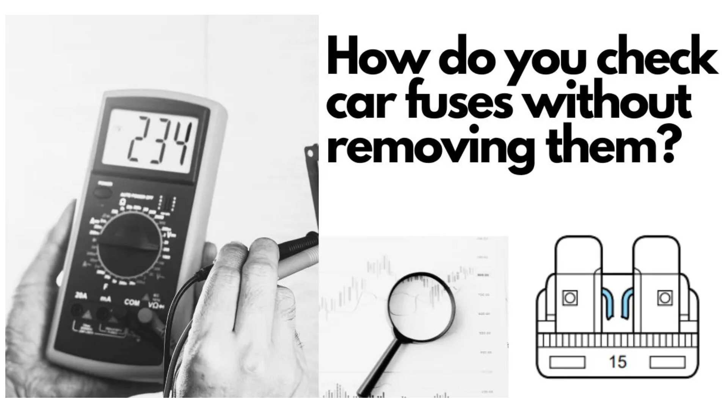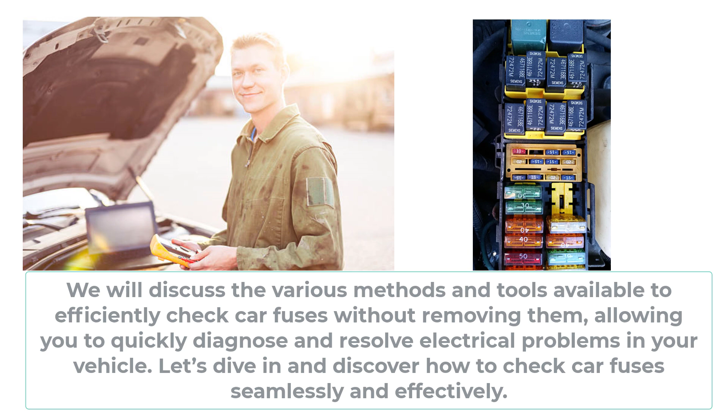In this video, we will be answering the most often asked question by car owners facing frequent issues related to electrical fuse errors: is it possible to check car fuses without removing them? We will discuss the various methods and tools available to efficiently check car fuses without removing them, allowing you to quickly diagnose and resolve electrical problems. Let's dive in and discover how to check car fuses seamlessly and effectively.

What to check before replacing a fuse. In the process of checking car fuses without removing them, it's important to prepare adequately for the task. Being well prepared sets the stage for a more efficient and accurate evaluation of the fuses, increasing the chances of identifying any potential issues without removing them.

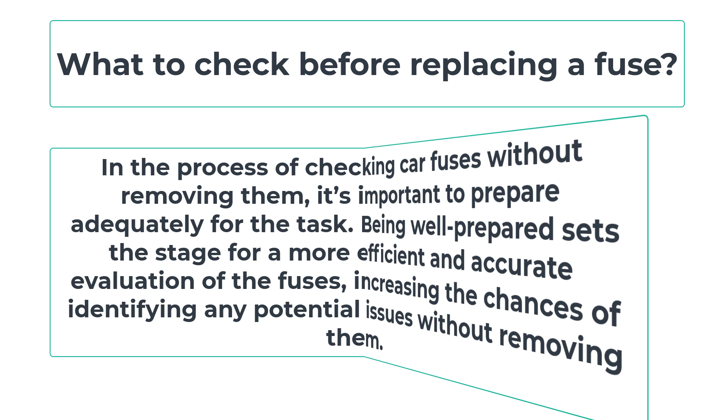Turn off the car. It also allows the fuse box to be safely accessed without the risk of live electrical connections. Consult the owner's manual and pay attention to any specific instructions or warnings mentioned. Ensure a clear view of the fuse box, which will allow you to navigate it more comfortably and ensure a comprehensive assessment of each fuse.

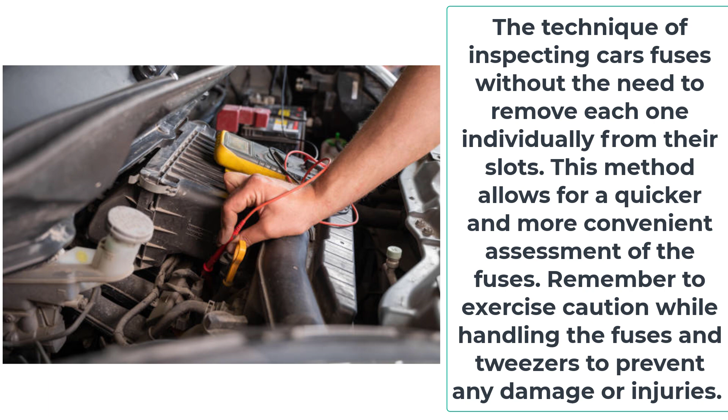The technique involves inspecting car fuses without the need to remove each one individually from their slots. This method allows for a quicker and more convenient assessment of the fuses. Remember to exercise caution while handling the fuses and tweezers to prevent any damage or injuries.

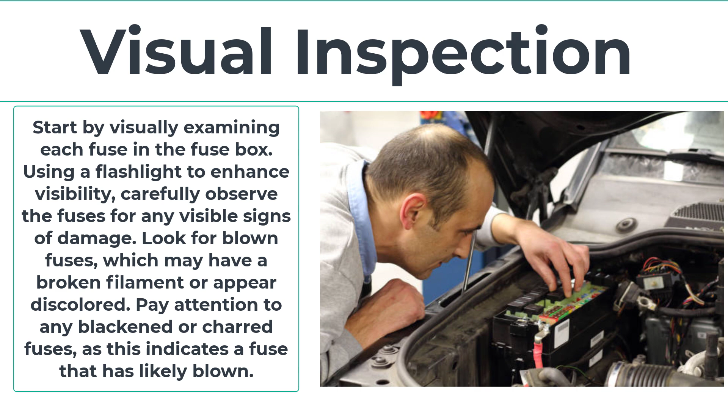Visual inspection: start by visually examining each fuse in the fuse box. Using a flashlight to enhance visibility, carefully observe the fuses for any visible signs of damage. Look for blown fuses, which may have a broken filament or appear discolored. Pay attention to any blackened or charred fuses, as this indicates a fuse that has likely blown.

Magnifying glass: if needed, utilize a magnifying glass to closely inspect smaller fuses or examine any intricate details. A magnifying glass can help you identify subtle signs of damage that may not be immediately visible to the naked eye, allowing for a more thorough examination and increasing your chances of detecting potential issues.

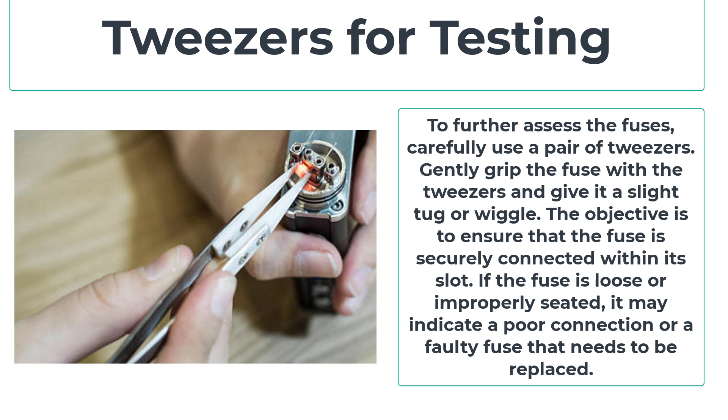Using tweezers for testing: to further assess the fuses, carefully use a pair of tweezers. Gently grip the fuse with the tweezers and give it a slight tug or wiggle. The objective is to ensure that the fuse is securely connected within its slot. If the fuse is loose or improperly seated, it may indicate a poor connection or a faulty fuse that needs to be replaced.

Test the fuse with a test light. To check car fuses without removing them, a test light can be used. Simply press the test light against one end of the fuse and ensure it illuminates, then repeat the process on the other end.

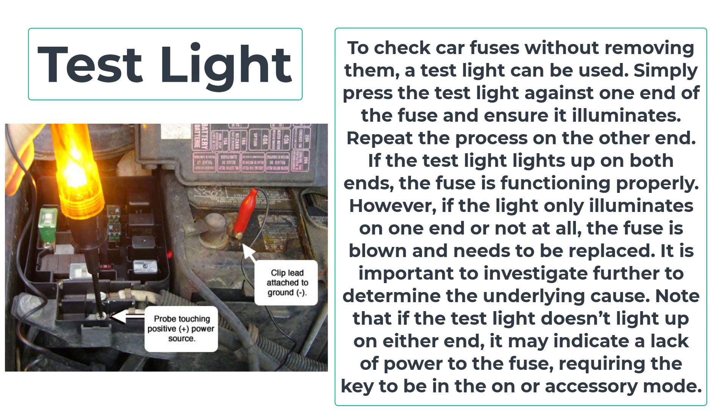If the test light lights up on both ends, the fuse is functioning properly. However, if the light only illuminates on one end or not at all, the fuse is blown and needs to be replaced. It is important to investigate further to determine the underlying cause. Note that if the test light doesn't light up on either end, it may indicate a lack of power to the fuse, requiring the key to be in the on or accessory mode.

Multimeter voltage: to check car fuses without removing them, start by turning the ignition on to activate additional circuits. Then, using a multimeter set to voltage measurement, with a minimum scale of 15 volts, measure the voltage across each fuse. You can either energize the circuit and retest, or remove the fuse and check its continuity separately using an ohmmeter or a battery with a test light.

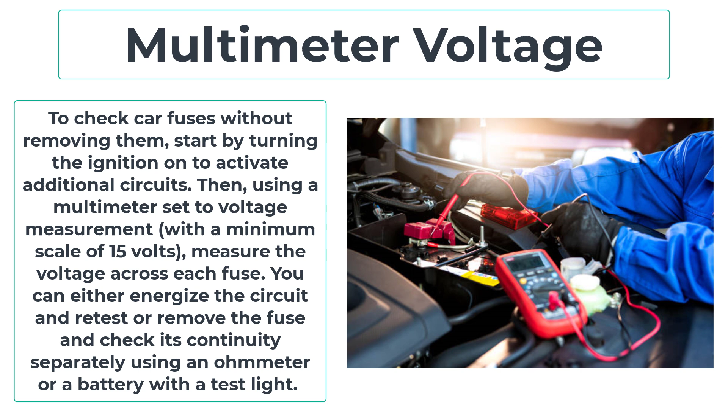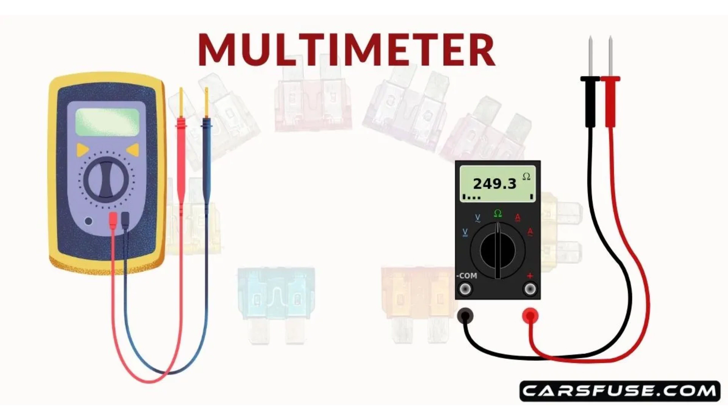Checking car fuses without removing them offers a more efficient and convenient method to assess the health of your vehicle's electrical system. By following the steps outlined in this video, you can save time and effort while gaining valuable insights into the condition of your fuses. These techniques provide a comprehensive assessment of the fuse's condition, enabling you to identify blown fuses or loose connections. Throughout the process, it is crucial to prioritize electrical safety, exercise caution, and seek professional assistance if needed, especially when dealing with complex electrical problems.

That's a wrap on our guide to check automotive fuses without removing them.